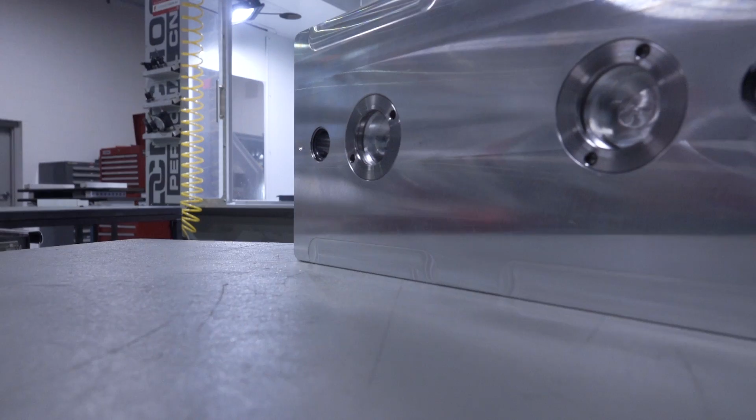Hi folks, let's machine a Pierson Pro-Pallet on our Tormach to show not only how we can create one from scratch, but it'll let us do custom size pallets and it'll let us reuse that hardware, which will help us reduce the costs over the life of using this fixturing system.

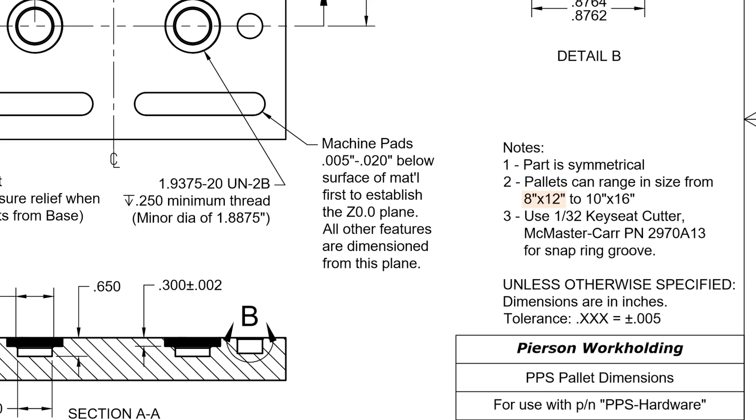Putting our piece of raw material on two mod vices, we're starting with a piece that's only 6 inches wide by 12 inches long, and the normal Pierson pallets are 8 inches. But I think that's one of the cool things about this video: we're still going to follow the Pierson print and the drawing and make sure we do this really well, but we don't necessarily have to have that full 8-inch width. Starting off with a Superfly to deck it off, let's talk about tolerances.

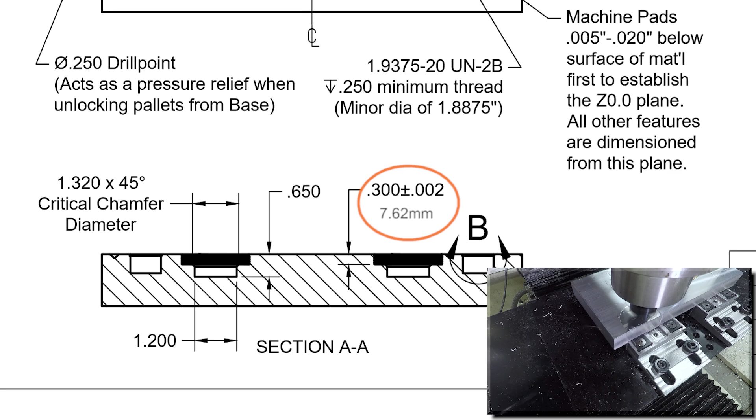There are a few critical tolerances on a Pierson pallet. The distance between this pad plane and this height here is very critical, 0.3 inches, and we can see that called out on the drawing. The way we programmed the part, under setup, stock, we have our stock set at 10 thousandths above the top of our part. If we zoom in, we can see we've got a small gap here, and we're zeroing off of that stock. And that cleans off the extrusion face, and it makes sure we're starting with a flat part.

Extrusion is not always flat. It can commonly be warped along both axes. That also lets me establish a consistent dimension between the top of our part and this pad. Now, we've got that modeled as 10 thousandths of an inch. And if we look at the Pierson print, the pads can actually be anywhere between 5 thousandths and 20 thousandths below. So there's a lot of flexibility and options there. I don't like options. I just want to have a known value and know that anytime we set this up, regardless of who's running the machine or making the part, we're going to make a good pallet.

Using a 1/2-inch twist drill to rough out some material and help give us better lead-ins for the machining we're about to do, and hopping over to the shear hog. Running it not quite at the limit, but we did want to focus on overall cycle time to make these pallets relatively quickly to save costs and keep the economics attractive. 4,000 RPM, 12.5 thou feed per tooth, that's 50 inches per minute, 0.2-inch optimal load, and 0.2-inch depth of cut.

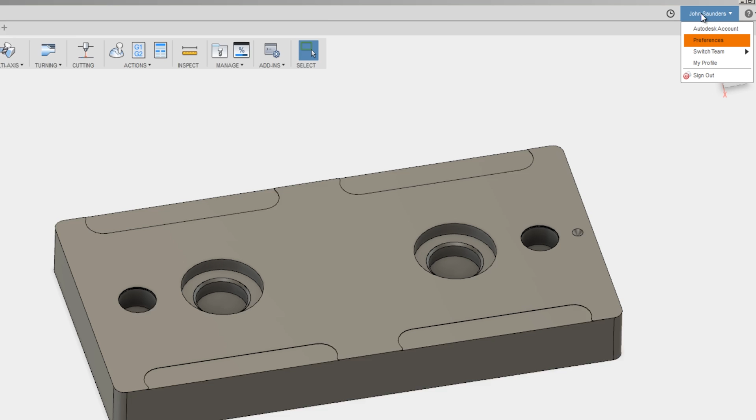We've become a big fan of showing the cycle time under your CAM operations. As you can see, they're listed here. Go to your name, preferences, CAM, and you can choose show operation machining time. That lets me see where's the lowest hanging fruit. If we are trying to optimize something, what takes the most time, that's where you've got the most potential to save. Coming in now to machine those pads, we're using a 1/2-inch end mill.

You don't have to do this. You could use a 1/4-inch or 3/8-inch end mill. I would not recommend using the shear hog. The shear hog is a great roughing tool, but it doesn't create perfectly flat floor planes, and that is an important feature of these pads. This is also what I would consider an optional step. I did want to machine both the sides, or at least one of them. That way we've got an external reference dimension that we can use for the coordinate system of the pallet, but again, it's not necessary.

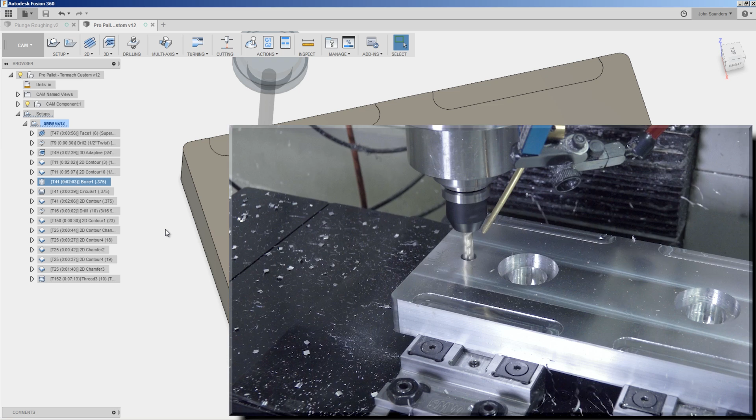Using an end mill to bore out the holes that will hold the hard turned sleeve that gives the Pierson its locating accuracy. And let's take a second to talk about what this is. So we like the Pierson pallet system. It's been a really good way to build fixtures that we can hot swap or quick change, lets us set up parts offline, but it is an investment. Now, you can buy pallets from Pierson, but it seems silly to be buying raw material for us all the way from Colorado when we have a machine shop.

So they sell the hardware kit. So this will let us machine our own. Great. Even better, they're reusable. We've even heard of shops that have a large quantity of Pierson pallets and they don't have a hardware kit for every pallet.

They just move the hardware kits between pallets. We also picked up the tooling kit. This is optional if you happen to have the thread mill or the snap ring cutter details. We also purchased the tooling kit that includes the thread mill, the eclip cutter, and the tool to install them.

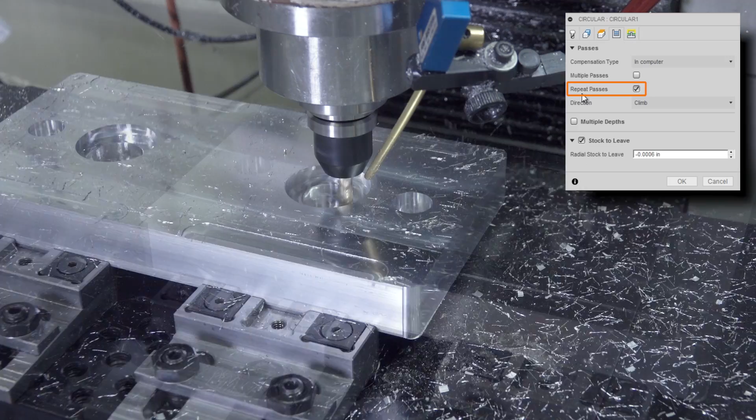As we do our finishing passes on these critical dimensions, under passes, we have repeat passes checked. That takes the spring pass, which just helps deal with the tool deflection and give us better tolerances. Coming in with the Woodruff key seat cutter to cut the eclip grooves, 450 surface feet per minute, 1,000th of an inch feed per tooth. It's programmed with a 2D contour, and the geometry that we selected is the bottom outside edge.

Finally, an edge break chamfer around our part just to get rid of any sharp edges, as well as a very light chamfer around the bored out holes for the eclips and bushings, as well as around the Z-axis locating pads. So this is a great example where you just couldn't tap this. So thread milling is the way to go, and you want it done reliably, and the fit was great.

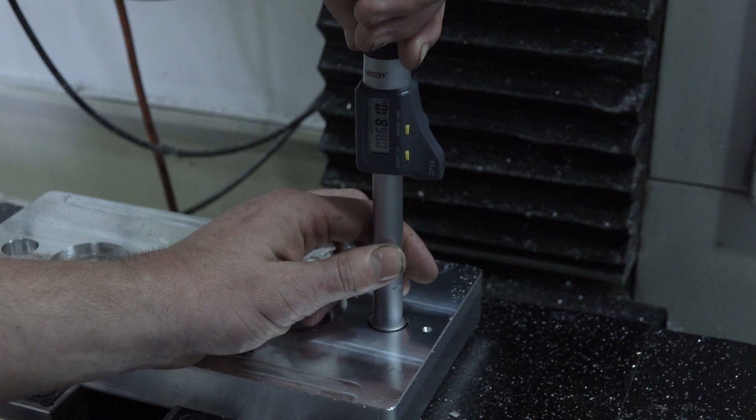Before we pull the part off, though, we want to walk out the tolerances for those bores. This is one of the most critical tolerances on this pallet system because those bores hold the hard-turned bushings, and those bushings are what give us the repeating accuracy of this pallet system.

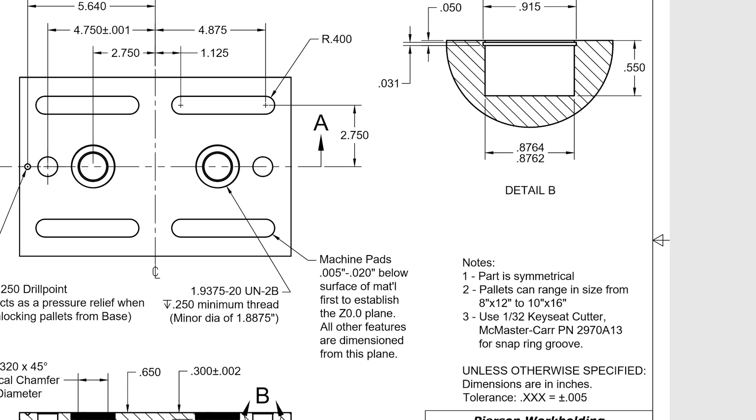We want to hit the dimension shown on this print, which is within 2/10,000ths of an inch, but we really want it between 8762 and 8764. 2/10 is really beyond the capability of not only a Tormach, but frankly, most machining centers. And so we did some testing, and two things that we observed.

Number one, we had to machine these slightly oversized to the tune of about between 1/2 thou and 1,000th of an inch. I think some of that is because the circular interpolation of the Tormach is not perfect, at least when we're dealing with tenths, and so we needed it to be a slightly larger hole to deal with that lack of circularity and let that bushing press in there.

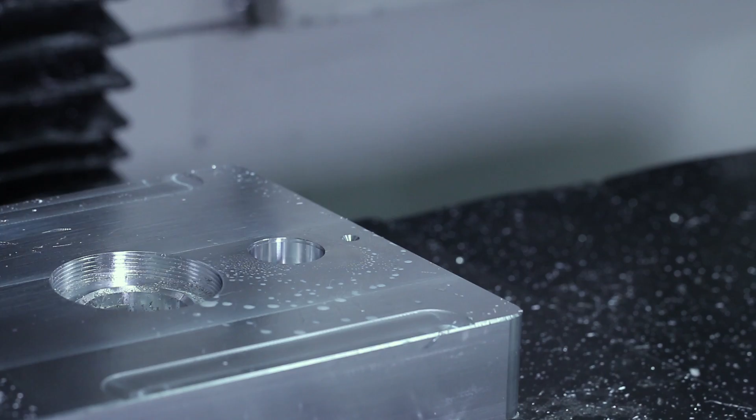What we've also found is we still had phenomenal repeatability, and I think some of that has to do with the way that the pin is more accurate, and Jay hard turns them in one operation on his Doosan lathe. I suspect, at least from what we've seen, that while we should strive to hit this tolerance, it's okay to be a smidge over. And what we also found is if you are too tight on it, you will never be able to get that bushing out.

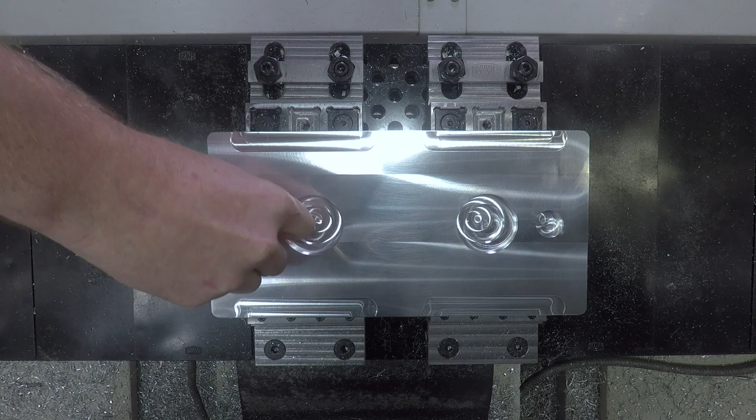And that goes against the spirit of what we're trying to do here, which is make sure that we can reuse this hardware if we damage a pallet or if we need to replace it, or we just want to swap out the hardware to another pallet. Once we got that machine fit that we like, you'll see here the bearing will slip in, but it has no wiggle whatsoever. And then we just throw in the eclip to keep it captive and held in place.

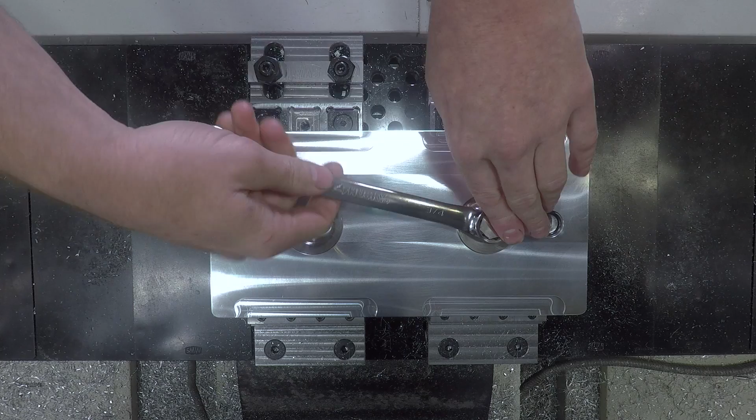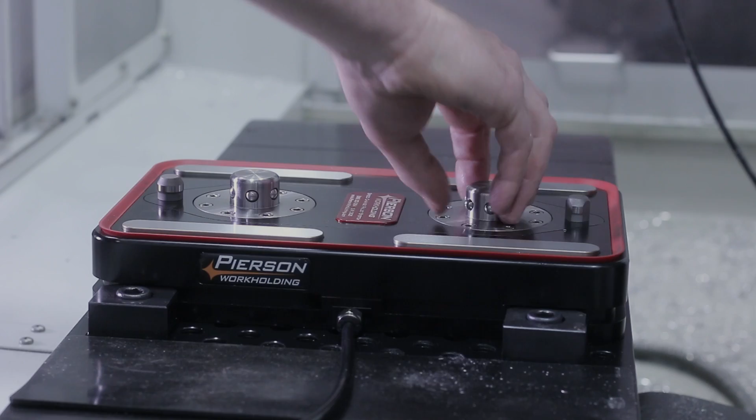We're done. Let's test it out. Making sure that the Pierson Pro-Pallet doesn't have any chips on those 4 locating pads. That's really important. Drop it into place. We can feel for that wiggle, and when we lock it down, we can feel how stable it is, including just doing a knock test.

And now let's test, is it repeatable? Grabbed our Mitutoyo tenths indicator, zeroed that out. We can pull the pallet off, put it back on, and you can see it repeats exactly back to 0. That's awesome.